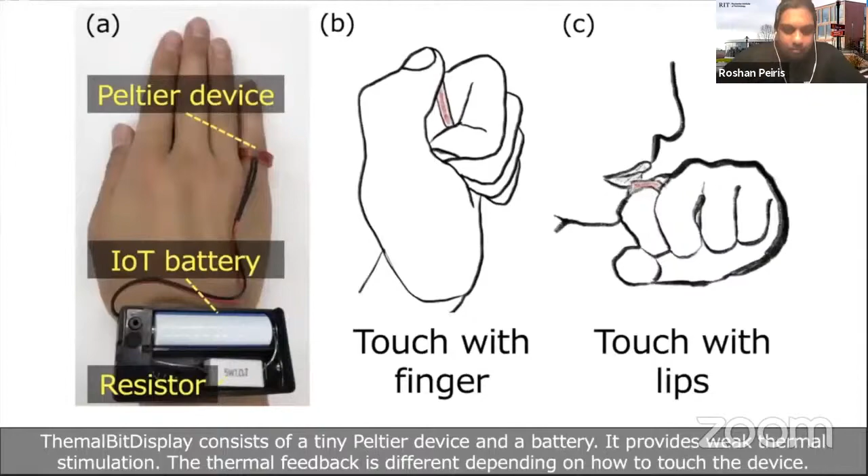Okay. I am Arinobu Niijima from NTT Corporation. We will present ThermalBitDisplay, which is a haptic display that provides thermal feedback perceived differently depending on body parts. ThermalBitDisplay consists of a tiny Peltier device and a battery. It provides weak thermal stimulation. The thermal feedback is different depending on how you touch the device.

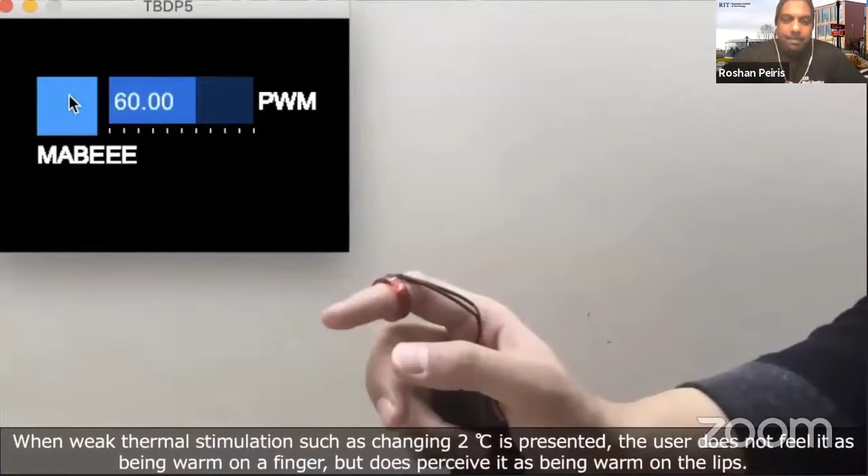When weak thermal stimulation, such as a change of 2 degrees Celsius, is presented, the user does not feel it as being warm on the finger, but does perceive it as being warm on the lips. There are some studies using Peltier devices embedded in wearable devices to apply thermal feedback to several parts of the body, such as wrists and fingers. Our motivation is to explore new interaction using thermal feedback for new applications that are different from those using vibrotactile feedback.

Our method is based on physiological and psychophysical studies on thermal perception. One is the different thresholds of thermal sensitivity for each body part. The lips are the most sensitive part of the body, and the extremities are insensitive. Therefore, weak thermal stimulation can be perceived on the lips. Another important feature is spatial summation of thermal perception. Due to it, the area of stimulation plays a prominent role in the thermal threshold. For example, if the area of warm stimulation doubles, the threshold can be halved. In other words, the smaller the area is, the more difficult it is to be perceived.

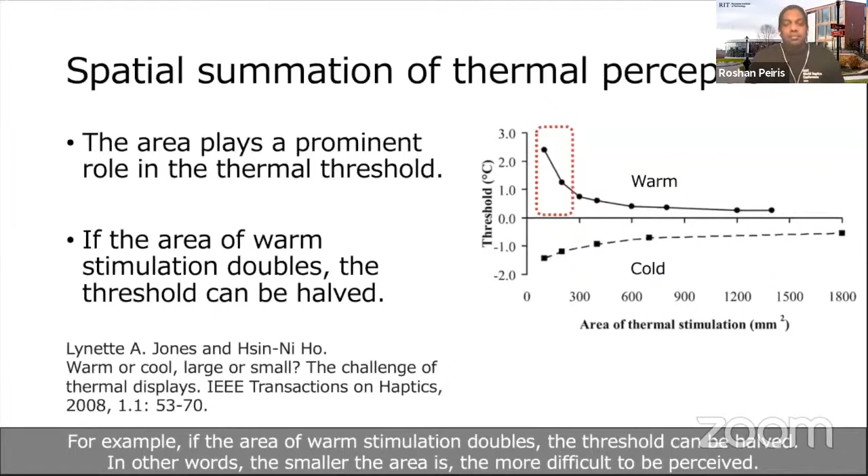Based on that, we decided to use the smallest Peltier devices to make the differences in the detection thresholds to thermal stimulation between each body part larger. We conducted a preliminary test to investigate different detection thresholds by an adjustment method with a tiny Peltier device. The results were consistent with previous studies. The more sensitive the body part was, the lower the detection threshold for warming and cooling.

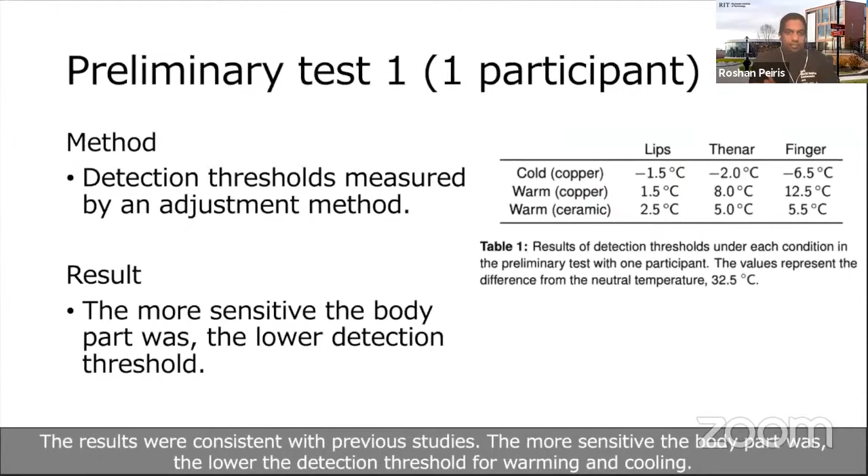Then we conducted an experiment with 12 participants. The question is whether the thermal feedback can be perceived differently between differently sensitive body parts. The task is to discriminate two different thermal stimuli presented on the finger, the wrist, and the lips. One stimulation is 25 degrees Celsius and the other is 27 degrees Celsius, presented by the tiny Peltier device. Participants conducted the task 20 times for each body part. The results showed that the median accuracy was 55%, 65%, and 95% respectively. These results mean that the participants could perceive the warm stimulation only on the lips. Therefore, the thermal feedback is perceived differently on the finger and the lips.

Next, we present ThermalBitDisplay with 3 Peltier devices. The outer Peltier devices were cold and the center one was hot. When touching them with a finger, the user perceives cold and no pain due to spatial summation. When touching them with the lips, the user perceives heat and pain due to the thermal grill illusion. We conducted a preliminary test with 10 participants to verify the phenomenon, and all of them described that when touching them with the lips, they felt hot and pricking pain. We assumed that the hot stimulation and the cold stimulation were perceived separately on the lips, so the participants felt heat and pain.

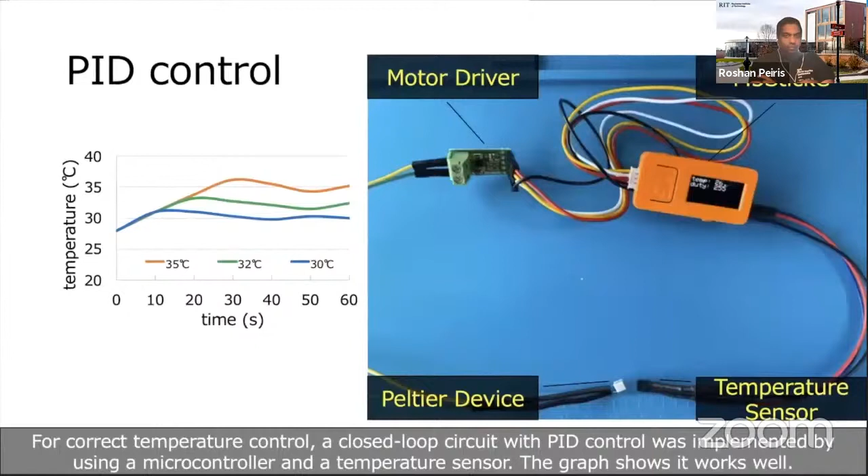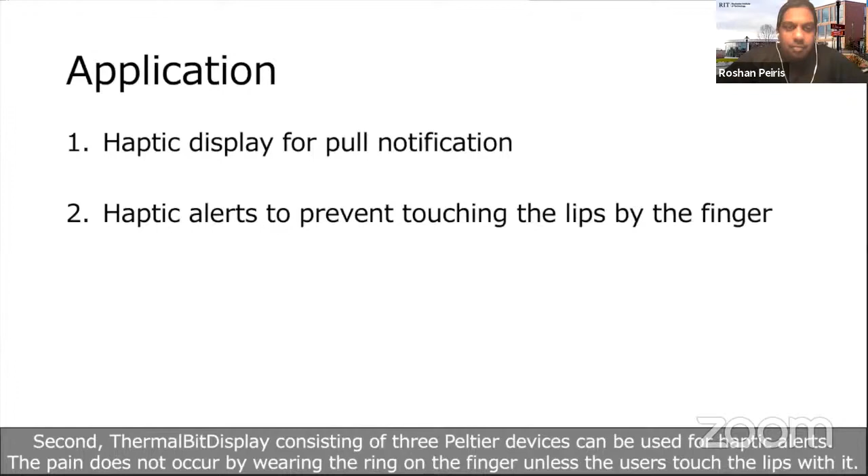Finally, we propose some applications. First, ThermalBitDisplay can realize haptic pull notification, unlike vibration, which is used for haptic push notification. Thermal stimulation does not interfere with the user's attention by just wearing the device. When they want to get a notification, they can do it by touching the display with the lips. Second, ThermalBitDisplay consisting of 3 Peltier devices can be used for haptic alerts. The pain does not occur when wearing the ring on the finger unless the user touches the lips with it. Therefore, it can prevent putting the fingers to the lips, and we consider it will be useful to prevent virus infection.

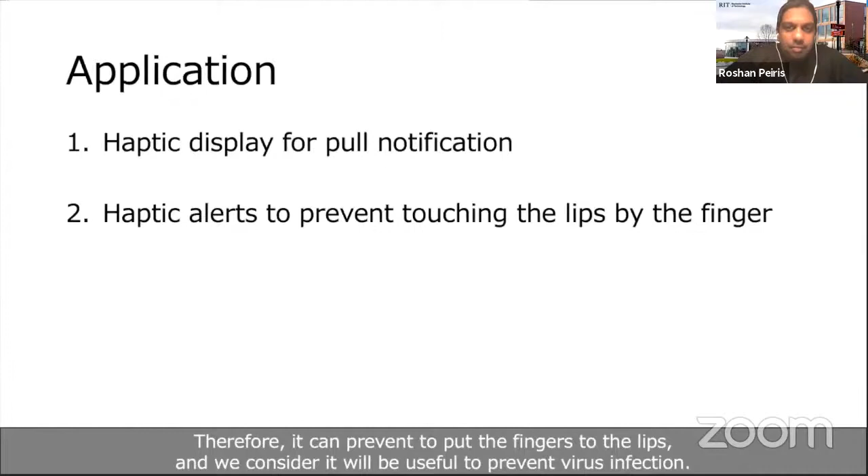Here is the conclusion. ThermalBitDisplay provides different thermal feedback depending on the parts of the body touching it by utilizing 2 features of thermal sensitivity. In future work, we will investigate the feasibility and usability in the real world. We will design the gestures possible with the device more carefully in view of cross-cultural considerations.

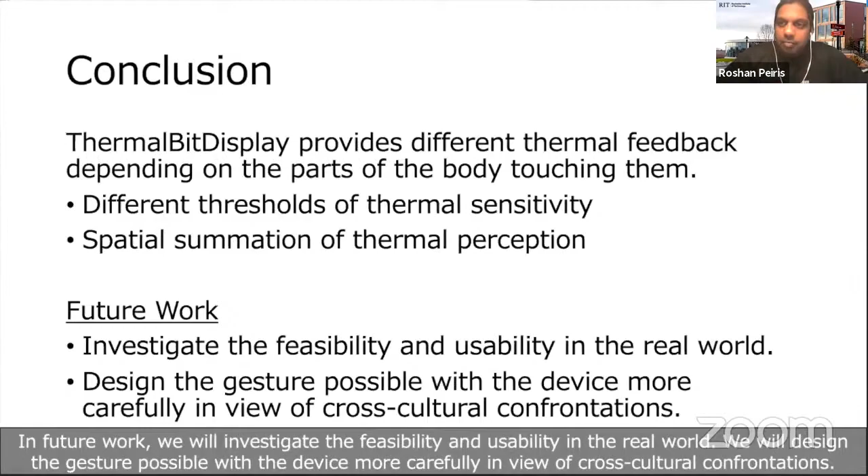Thank you very much. So I can see a couple of questions already in the chat area. So the first question is from Sebastian, he's asking what spatial resolution did you use between each Peltier element? Arinobu. Okay, thank you. The interval is 5 millimeters. Experiment 2. Yeah, we conducted only one pattern, 5 millimeters.

All right. Yeah, next question is from Pedro. Does Pedro want to ask it, or shall I go ahead? I can ask it if you don't mind, Roshan. Yeah, I think I'm putting my head in here again. Yeah, that was really cool.

I wonder, maybe I didn't understand it properly, but in the case that you called it a 2-bit display, I had one Peltier here and one Peltier here. Did you feel that your participants could only feel the difference between the two? So I feel they're the same or they're different, in which case I really only have 1 bit again, because I can put that bit on 1, I feel a difference, or on 0, I don't feel any difference. Or could they tell this is hotter than the other, this is colder than the other, in which case you then have all the 4 values again? Does it really do the 2-bit 4 values, or only difference? Maybe you can elaborate a little bit.

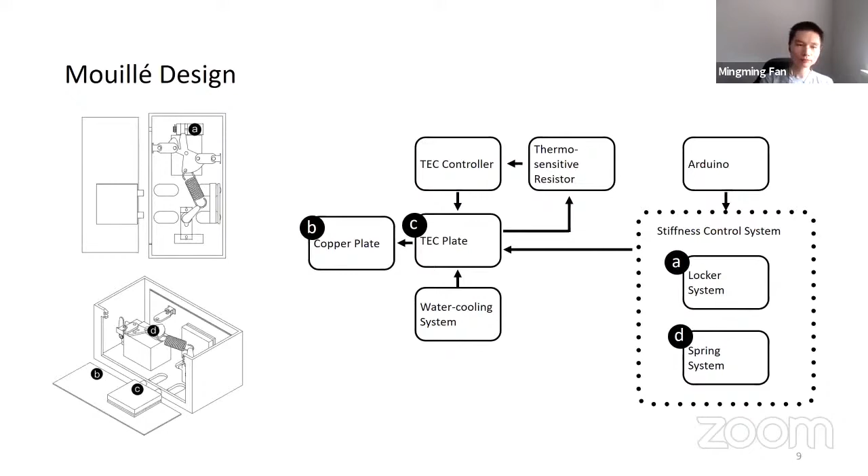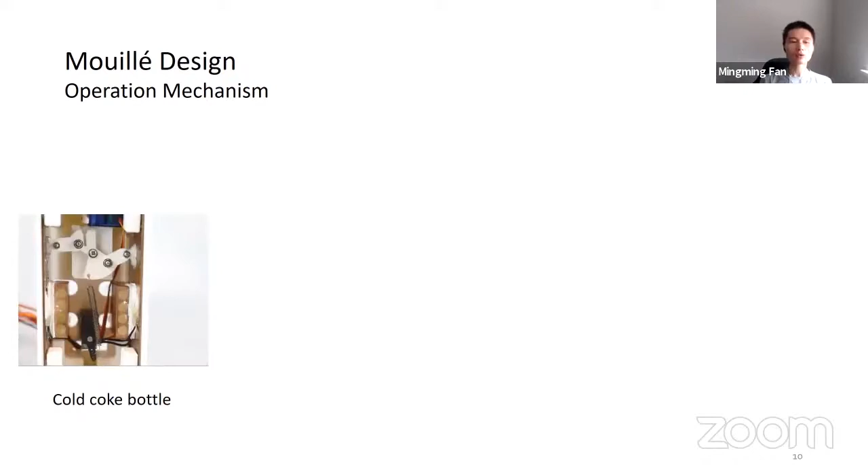So here you can see how Mouillé operates in real reality. Here is how we simulate the cold Coke bottle. As you can see in this prototype, Mouillé's locker system is in an unlocked position and the spring is fully expanded. This allows the full expansion of the prototype to give the user that flexibility of fitting. And if the locker system is placed in the locked position, we can simulate a hard object like an ice cube.

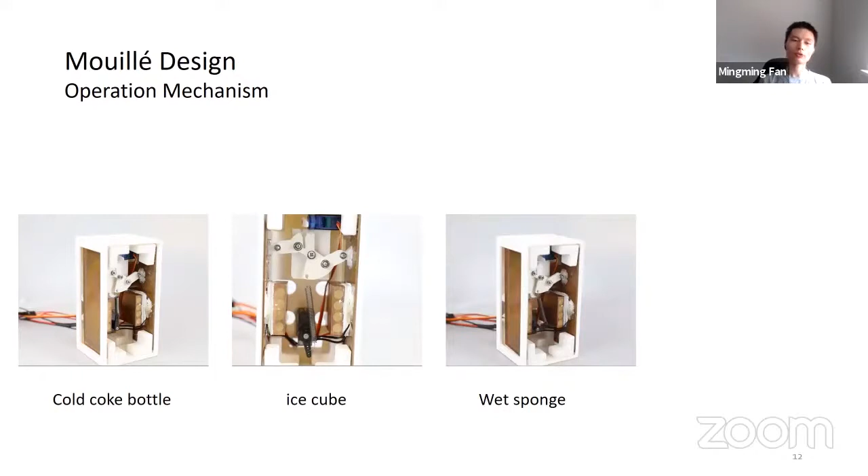And to simulate objects like a wet sponge, we apply a layer of latex on top of the surface so that users can feel the sponginess of the surface. And to simulate the wet table surface, we lock the system and place it horizontally so that users can scratch the surface to feel the wetness illusion.

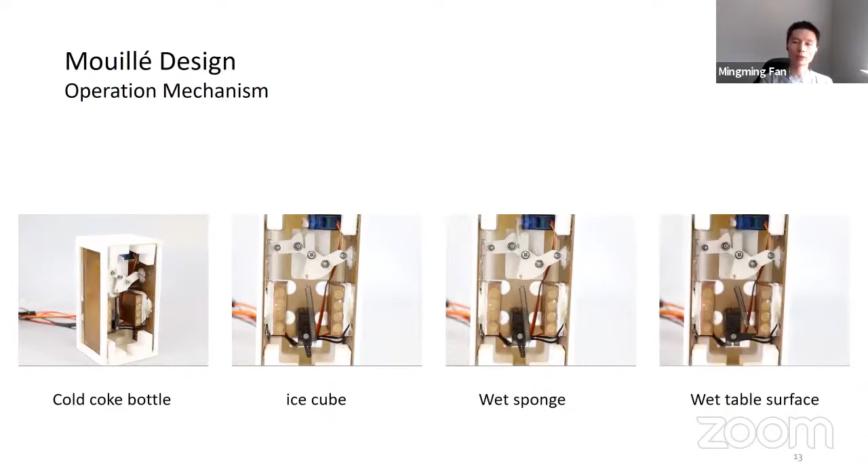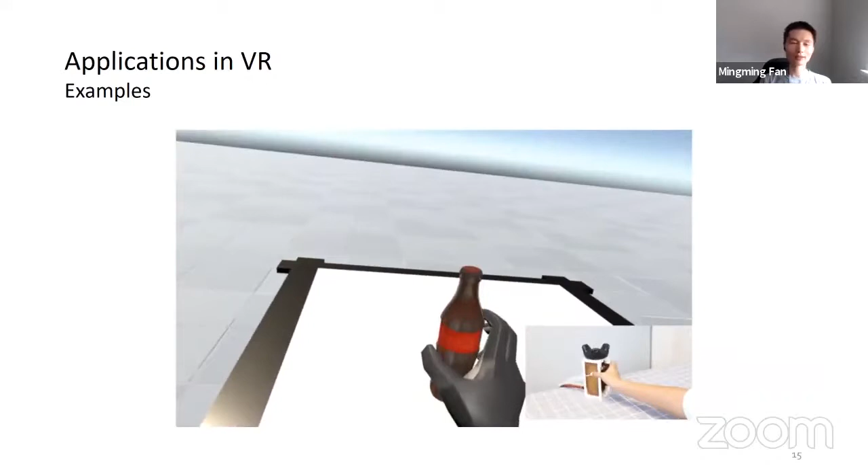And then we designed a number of applications that allow users to feel these different types of wetness illusions. So basically, as you can see, with the system we're able to simulate the wetness illusion for an ice cube, the Coke bottle, the wet sponge, and also the wet table surface when the user scratches on it.

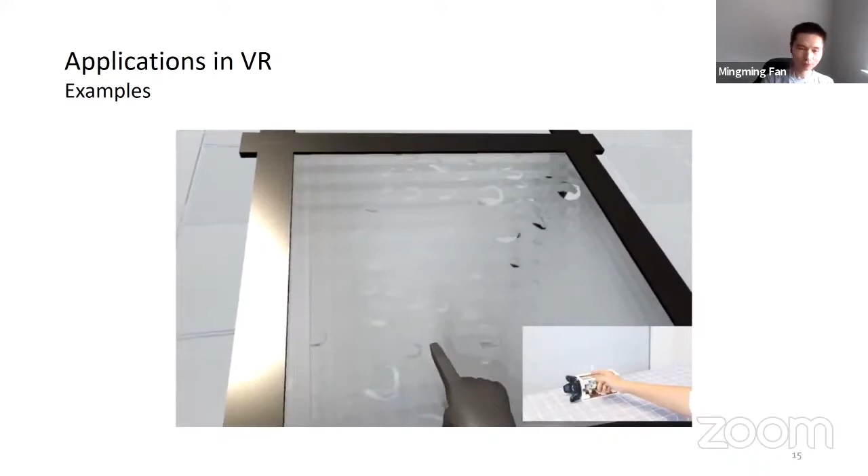And then we conducted a study. Basically, we wanted to understand, with Mouillé, could users feel these different types of wetness illusions? Could people distinguish the wetness illusion of an ice cube from a Coke bottle and from a wet sponge? And the second question is, if users were able to feel these different types of illusions, could they feel different levels of wetness illusions, meaning whether they can feel really wet versus a little bit wet.

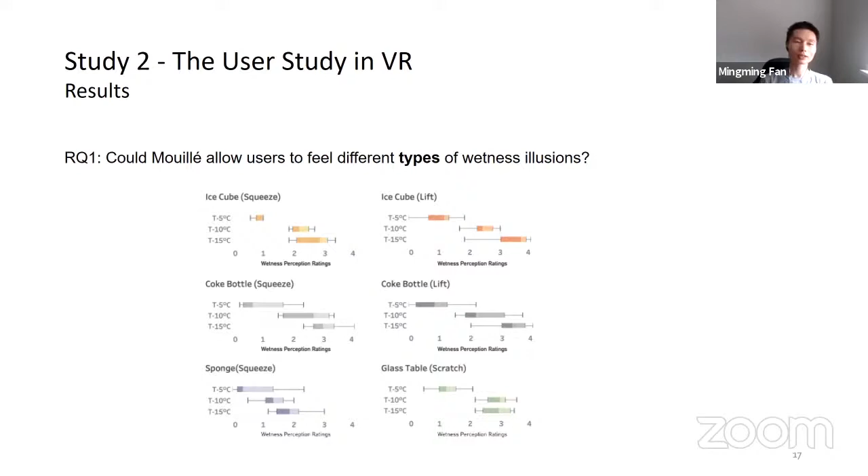Again, I think all the details are in the paper here, I just want to highlight at the high level. Yes, our results show that users were able to distinguish the different types of wetness illusions. And for the different simulated wet objects, users indeed were able to distinguish 3 different types of wetness levels for most of the objects. And for most of the objects, the accuracy was actually over 80%. But for the glass table, the accuracy was slightly lower, which I will go into later on.

So I just wanted to highlight some of the observations and the feedback from the studies, which we think are very interesting and inspirational. Here is that during the study, many participants actually asked us if we could help them dry their fingertip, because during the study, they were not allowed to see the system. So they didn't know what was going on to create that illusion of wetness. And they couldn't rub their fingers, so they wanted us to rub their fingers for them to dry the fingers.

And then later on, when we asked them what they think was going on, they told us that probably the system had a moisture generator, like a humidifier, and it might have a dryer which blows air to their finger to dry their fingers quick enough. And then maybe there is some mechanism to generate different types of wetness.

And here I wanted to point out 3 things we found interesting and sort of the limitations of the system, which we think maybe the community can help address looking forward. So one of the things is that the wetness illusions that Mouillé generates disappear much faster than true wetness. By that I mean, when the user's finger lifts from the Mouillé system, the illusion disappears. That's very different from getting your fingers wet by touching a wet Coke bottle, for example, because that true sensation will last for a while.

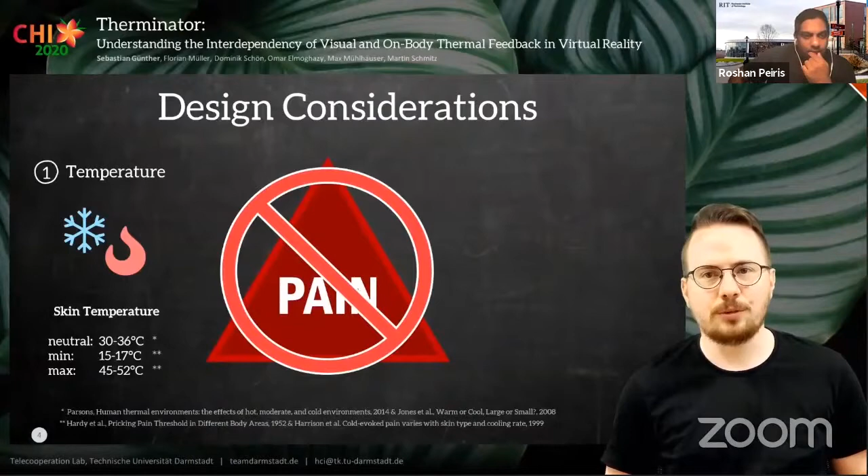Okay, so before we can apply thermal feedback to users, we have to look at some design considerations. First of all, we have to take care of the temperature range. Hereby, we need to consider the neutral skin temperature, which lies usually between 30 and 36 degrees Celsius. However, the range has to be limited since we do not want to cause any pain and take care of thermal pain thresholds, which lie at around 15 degrees Celsius as a lower boundary and around 45 to 52 degrees as an upper boundary.

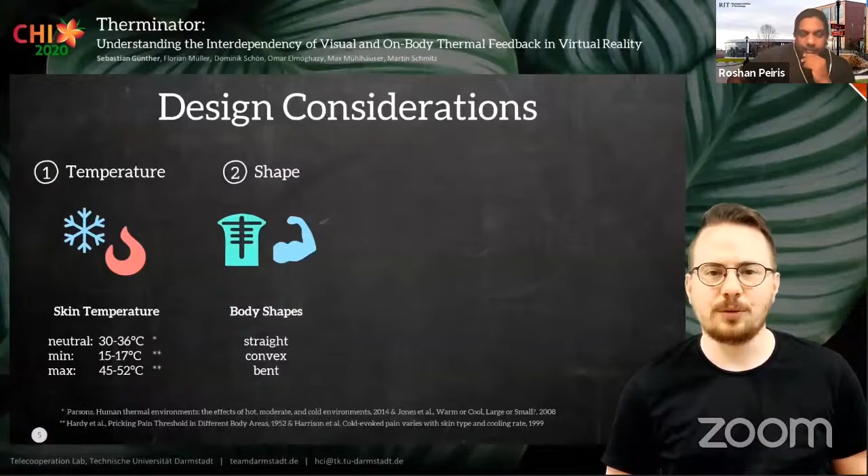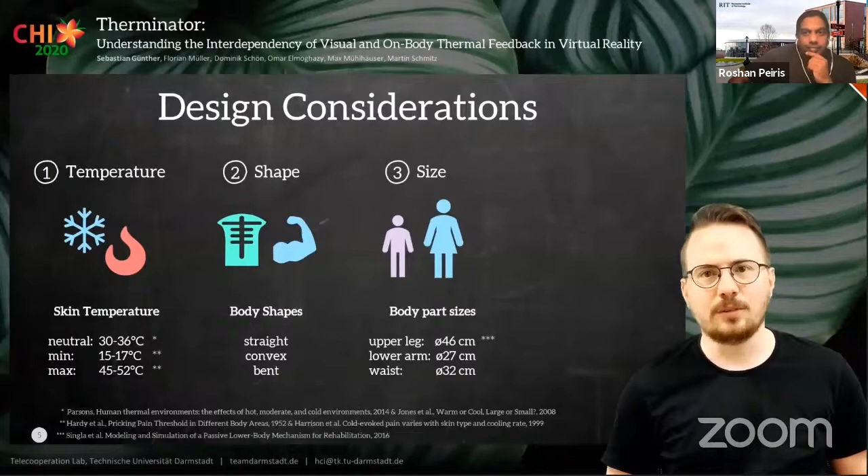Besides the temperature, we also need to consider different anatomical properties of the human body, such as different shapes of different body parts. For example, we have a straight leg, a convex abdomen, or a bent spine. Further, as humans differ in size, body parts are also not equal. For example, the upper leg is almost twice the size as the lower arm and can even vary between individual persons. And last but not least, we do not want to restrict any movements and have to consider varying degrees of freedom of different body parts which can have multiple joints and are able to bend or stretch.

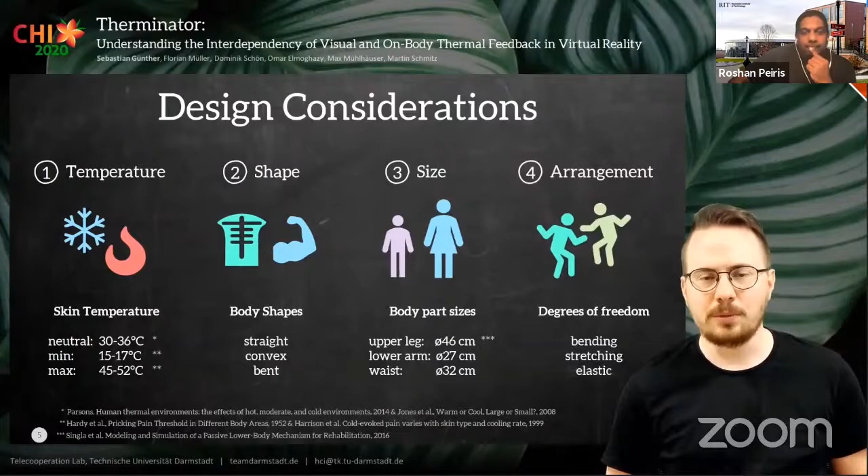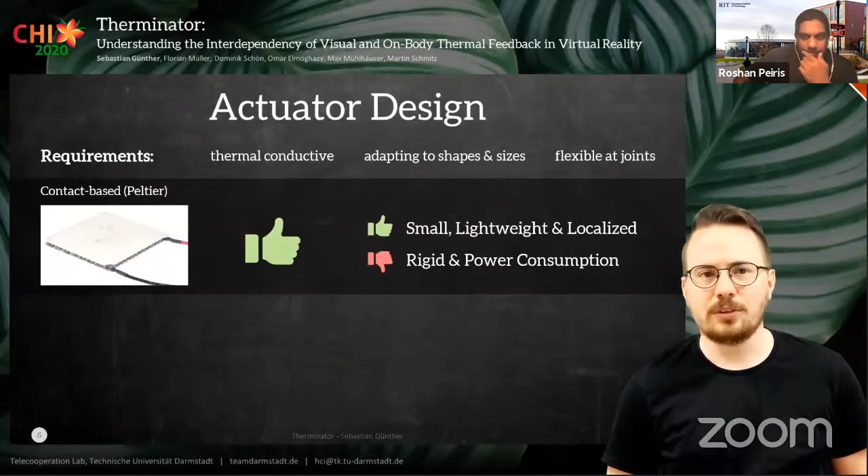So in summary, the requirements for thermal feedback are a good thermal conductivity, adapting to shapes and size, and it needs to be flexible at body joints. As thermal feedback is of course not completely new, related approaches often rely on contact-based solutions, such as thermoelectric Peltier elements. Those have very good thermal properties and also have the advantage of being small, lightweight, and can provide very localized feedback. However, due to their nature, they tend to have a high power consumption and can restrict movements through their rigidity, especially when simulating larger areas.

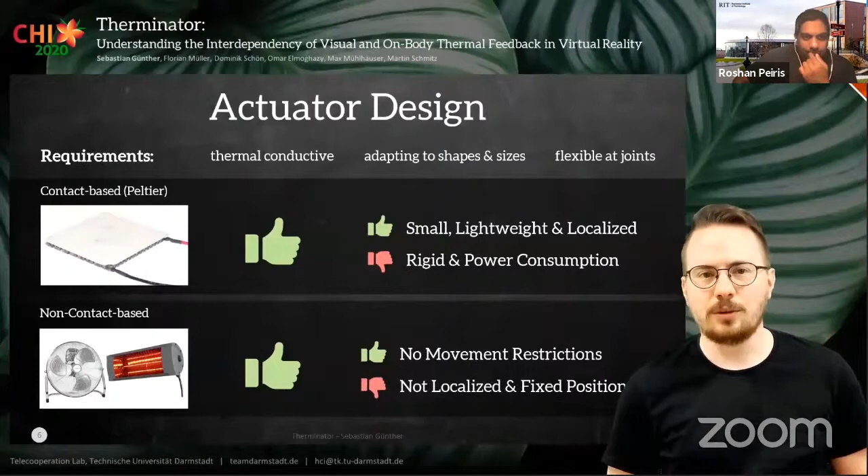In contrast, there also exist non-contact based solutions which use external heating units or fans. Those also have good thermal properties, but also have the advantage to not hinder any movements. However, since they are not directly attached to the body, it is not trivial to actuate specific body parts while the user is on the move. So, to overcome those disadvantages, we thought, why not use liquids as a medium to transfer temperature? And for this, liquids have the advantage to have good thermal properties and can be used very flexibly. In particular, we had a look at water, which has a thermal conductivity of roughly 0.6 watts per meter times Kelvin.

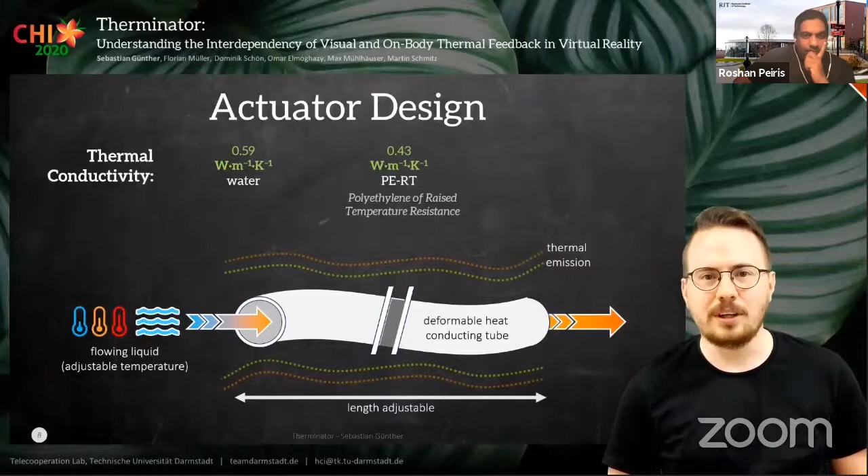Of course, liquids need to be inside some container to be actually useful, so we decided to take tubes which we can adjust, bend, and where a liquid with different temperature can flow through. For this, our tubes had to have similar thermal conductivity as water and allow for enough flexibility, which we found in tubes made of polyethylene of raised temperature resistance, or short PERT tubes. Using such tubes allows us to have different arrangements and numbers of interconnected subtubes in grill-like patterns to actuate small or large regions of the body. Further, we can reshape the tubes to adapt to different body parts and are also able to vary the length of each tube.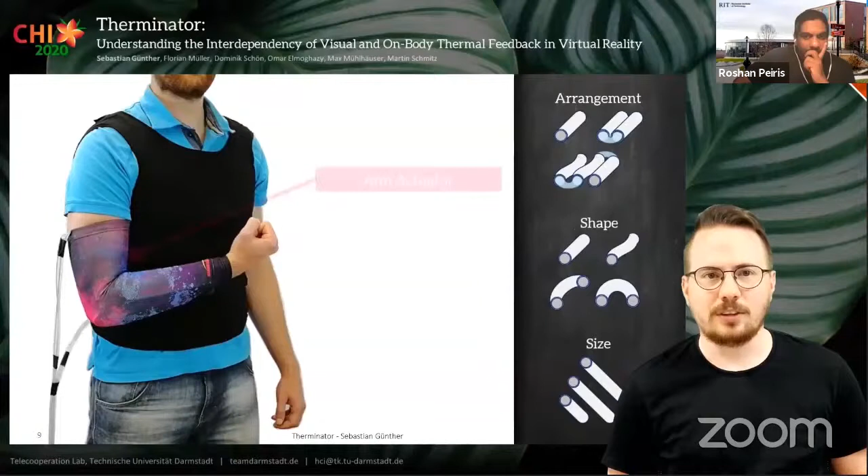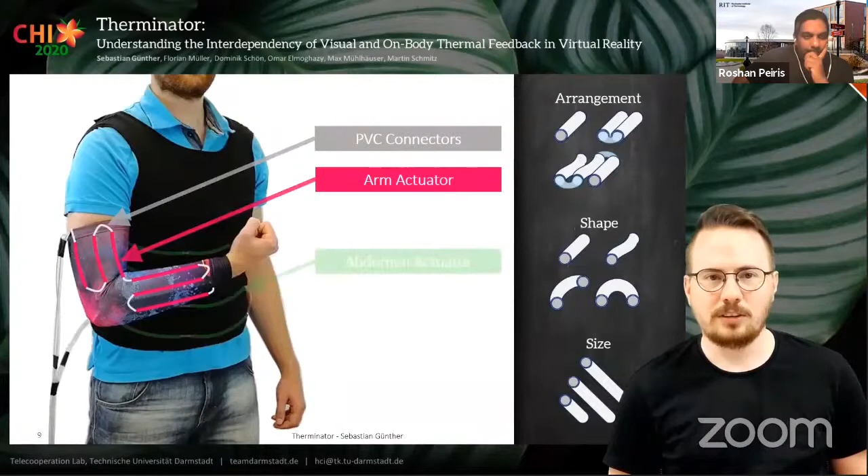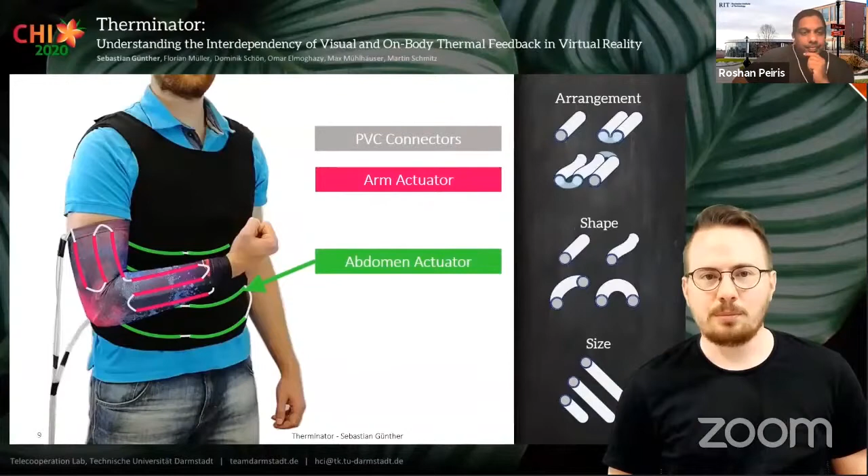As a proof of concept, we decided to design two actuators. The first can actuate the upper and lower arm. Here we use 8 subtubes which are connected through flexible PVC connectors to avoid movement restriction at the elbow joint. Second, we designed an abdomen actuator which aims to provide thermal feedback to a more flat part of the body and with a different anatomical shape than the arm. Finally, both are connected to our system's water cycle.

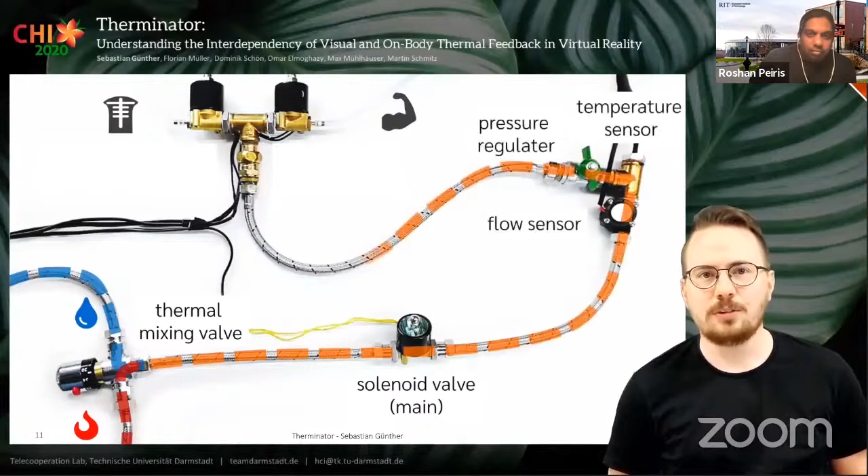For changing the temperature of each actuator, we mix a hot and cold water source using a thermal mixing valve. An electronic magnetic solenoid valve is used to control the actuation. We then measure the flow rate and inner temperature of the liquid and are able to adjust the flow rate through a pressure regulator. Then the liquid reaches 2 additional magnetic valves which control the flow to the abdomen and arm actuators.

And after having our system ready, we implemented 3 example applications which I will show you now. In the first, the user is a pirate on an island and needs to find precious gems. Those can be found in the water, which will cool down the user's arm when reaching for them. In the second application, a user plays a snowball game, and every time he gets hit by a snowball, the abdomen cools down quickly and slowly returns to the neutral temperature after some time.

In a final application, we simulate an emergency task where the user has to put out fires in a building. The more flames are extinguished, the cooler the environment gets. And okay, after this we thought, why should we stop here? Because there's something we still can do, as virtual reality can simulate unfamiliar situations such as having hot burning ice cubes. So we asked ourselves, what happens if thermal and visual stimuli do not match the temperature expectations of the user? For example, on the left, snow turns warm, and on the right, the fire turns cold.

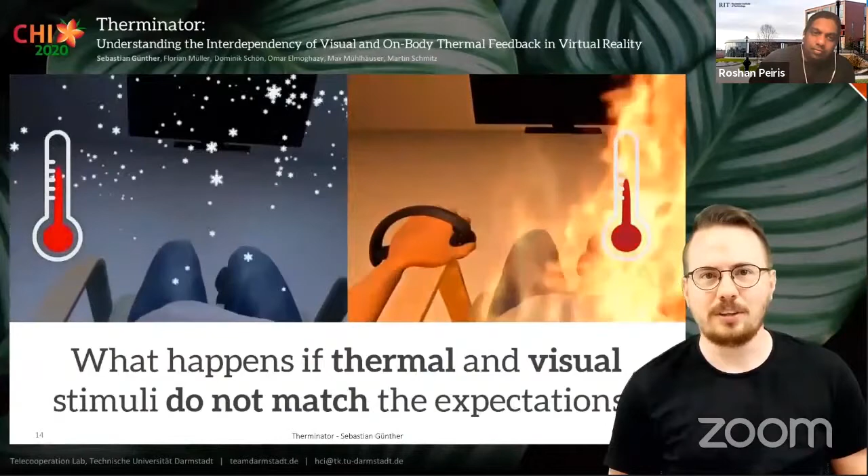Therefore, we defined 3 research questions which we wanted to investigate. First, how does the interdependency of thermal and visual stimuli affect the perceived temperature? Second, how do the thermal and visual stimuli affect the involvement of the users? And third, how do the thermal and visual stimuli affect the comfort of the users?

And to answer those questions, we first had to define what the thermal stimuli would look like. We used the neutral skin temperature of 32.5 degrees Celsius as a starting point. We then increased the temperature in 5 degree steps until we reached 42.5 degrees Celsius, so we stay below the upper pain threshold. We also did the same in the opposite direction and decreased the temperature in 5 degree steps until reaching 22.5 degrees Celsius, which is just above the lower pain threshold, resulting in 5 total thermal stimuli.

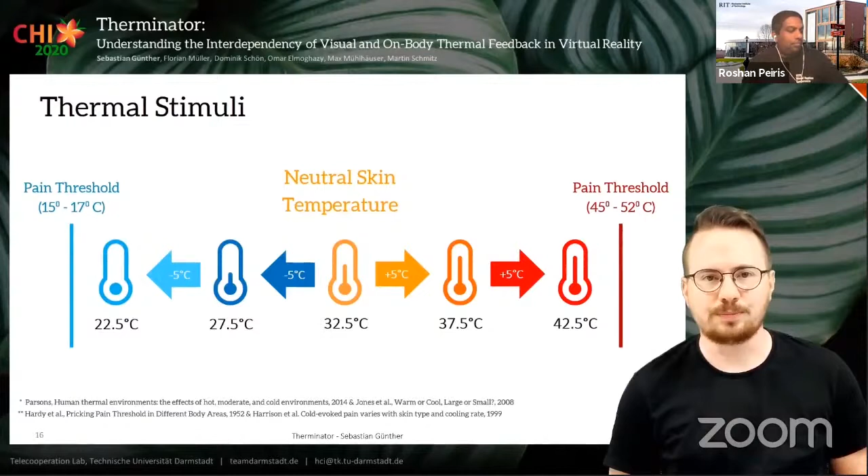For the visual stimuli, however, we had to identify meaningful visualizations. As Fenko et al. stated, objects convey different expectations of their temperature based on 2 factors. First, a literal or physical meaning, which conveys the actual temperature, and second, a figurative meaning that describes temperature by learned experiences. So to do so, we interviewed 7 HCI experts and asked them for visualizations, objects and other things connected to temperature, which they should rank from very cold to hot. Afterwards, we collected all the answers, clustered all items, and counted the common elements.

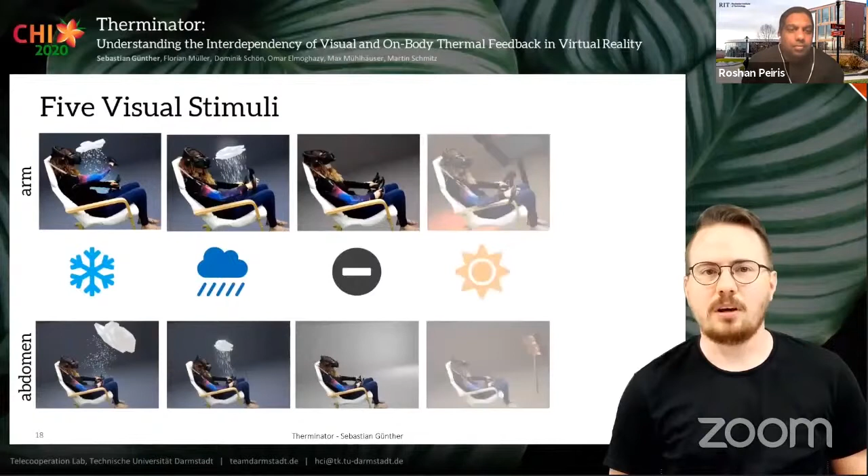This resulted in the following 5 visual stimuli, which we applied as visualizations for the arm as well as for the abdomen. We have a very cold snow visualization, a cold rain cloud, no visualization as our neutral visual stimulus, a warm heating lamp, and a hot fire close to the user's body.

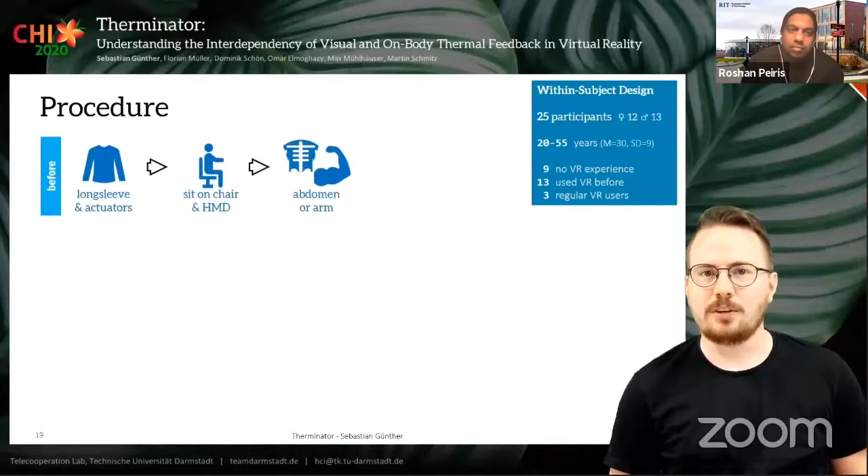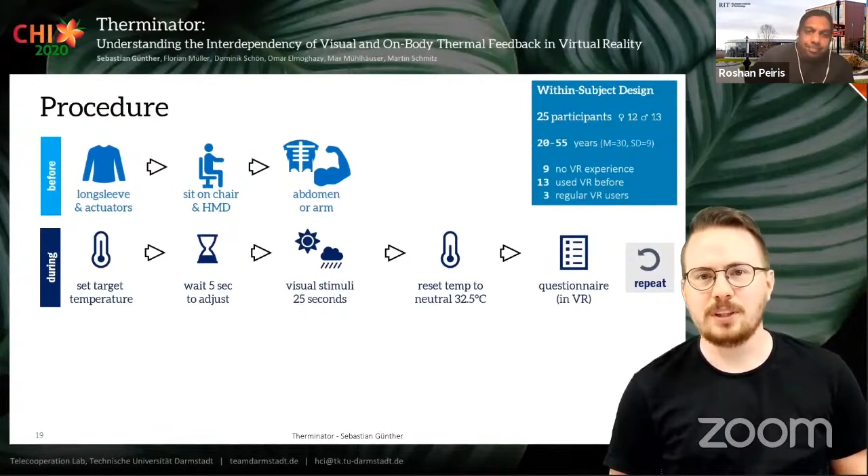For the procedure, I don't want to go into much detail. Basically, we used a within-subject design with 25 participants. All of them were provided with a long sleeve, were sitting on a chair and wearing our actuators beforehand. Each participant then started with either the arm or abdomen, and during each condition we combined each thermal stimulus with each visual stimulus and exposed each combination to the user for about half a minute. Afterwards, we reset both to their neutral stimuli and asked them to answer a questionnaire in VR, which I will show you in a second. In total, this was repeated for all 50 combinations. At the end, we asked for additional qualitative feedback through a final questionnaire and informal interviews.

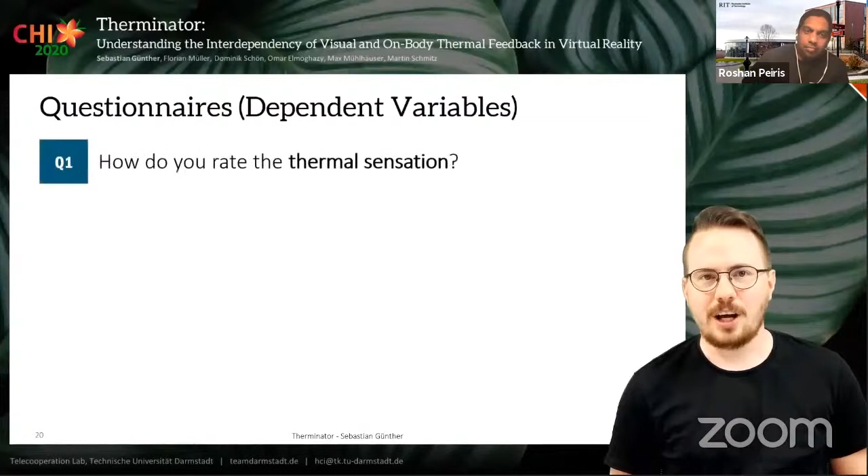As mentioned before, after each combination of the visual and thermal stimuli, we asked them to fill out a questionnaire with the following 4 questions. How do you rate the thermal sensation? How do you rate the thermal comfort? How much did the visual aspects involve you? And how much did the thermal aspects involve you? In the following, I will present our main findings. However, if you're interested in more details, especially lots of numbers and statistics, I would like to invite you to have a look at our paper.

So, okay, let's dig in to our results. As the first main result, we identified that every thermal stimulus always overrides the perception of visual stimuli. So for example, if we have a fire visualization combined with a cold stimulus, it still feels cold. As you can see here, where a lower number basically means a lower perceived thermal sensation and a higher number means a higher perceived temperature sensation. This was true for all other visualizations, and the participants were always rating the applied thermal stimulus as main factor for their temperature perception.

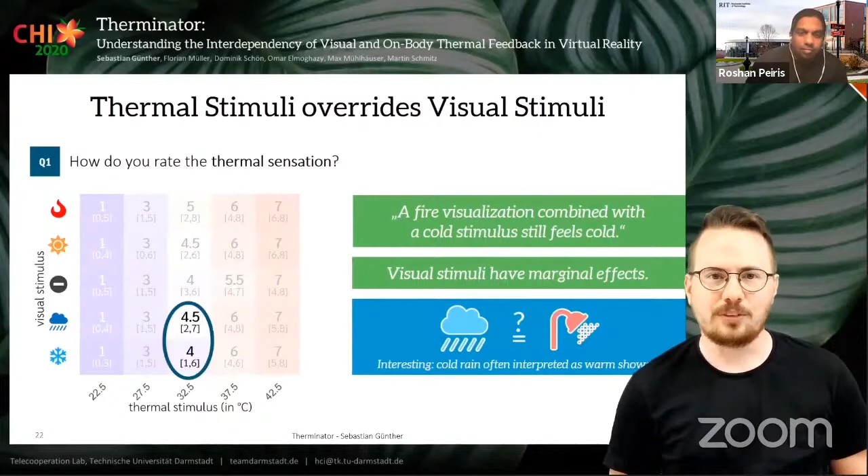However, if we take a closer look to the numbers, we can see that the visual stimuli still have marginal effects on the temperature perception. For example, for a neutral thermal stimulus, we see a significant higher rating while being exposed to a fire visualization compared to a snow visualization, which is also indicated by differences in the minimum and maximum ratings of the participants. One interesting side effect we could observe was an unexpected small shift for the rain visualization, which resulted by some participants describing it as warm shower instead of a cold rain cloud.

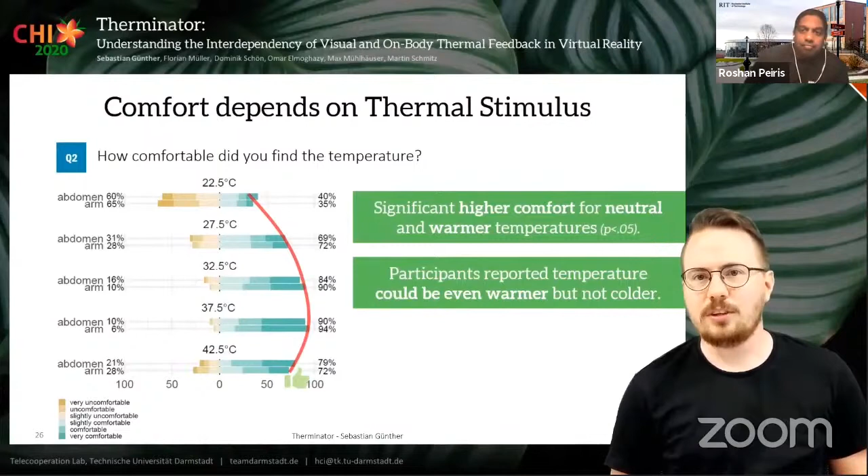Last but not least, with regards to the participants' comfort, we found that the level of comfort highly depends on the applied thermal stimulus. As you can see here, our analysis revealed a significant higher comfort for neutral and slightly warmer temperatures compared to colder stimuli. As a result, the overall consensus was that temperatures generally could even be warmer, but should not get colder, as more chill temperatures were perceived as uncomfortable and more intense.

And before concluding my talk, we, of course, identified some limitations. First of all, we only investigated the abdomen and arm and need to identify how other body parts will perceive the thermal stimuli provided by our system. Also, we only combined one visual and one thermal stimulus per condition. However, what would happen if we have multiple stimuli combined at once, or even actuate different body parts with different stimuli at the same time?

And lastly, while not described as restricting the users more than the HMD cable, our system currently relies on an external source which needs to pump the liquids to the actuators. Hence, we need to find reliable ways to increase the mobility, for example by having smaller amounts of liquids and thermal devices in a wearable backpack.

And hereby I want to conclude my talk where I presented you Therminator. I presented you a set of concepts and design considerations, a prototype along with 3 example applications, and a systematic evaluation investigating the interdependency of thermal and visual stimuli, where we found that thermal stimuli always override visual stimuli, congruent stimuli increase the involvement, and the comfort depends on the thermal stimulus.

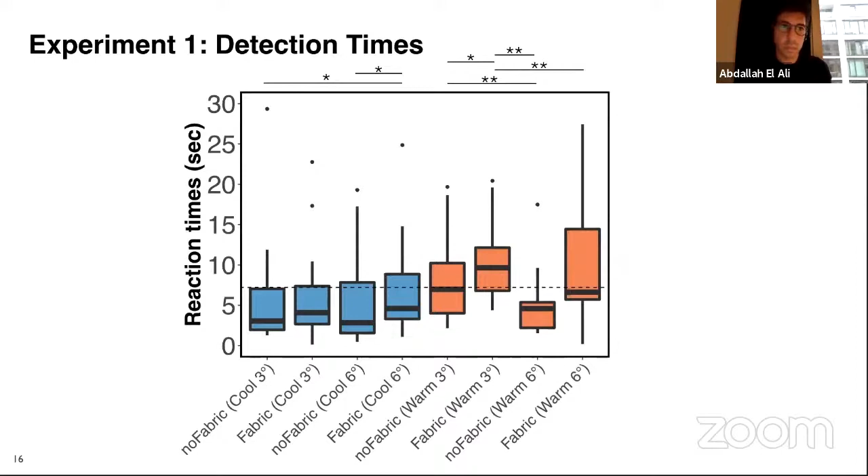For cool stimuli, the average detection times range from 5.5 seconds low intensity to 5 seconds high intensity. So due to this, we chose to continue testing for experiment 2 without any fabric.

In the core study that we've done in this paper, we draw on the EU Emotion Voice database, where we selected 8 messages and synthesized neutral counterparts using WaveNet. We ensured that these were indeed perceived to be neutral through an annotation study that showed high intra-class correlations. So first I'll play the EU Emotion Voice version, and then followed by the version that we generated.

I love chocolate. And now the neutral version. I love chocolate. And for our negative valence message, cover your mouth when you sneeze. Cover your mouth when you sneeze.

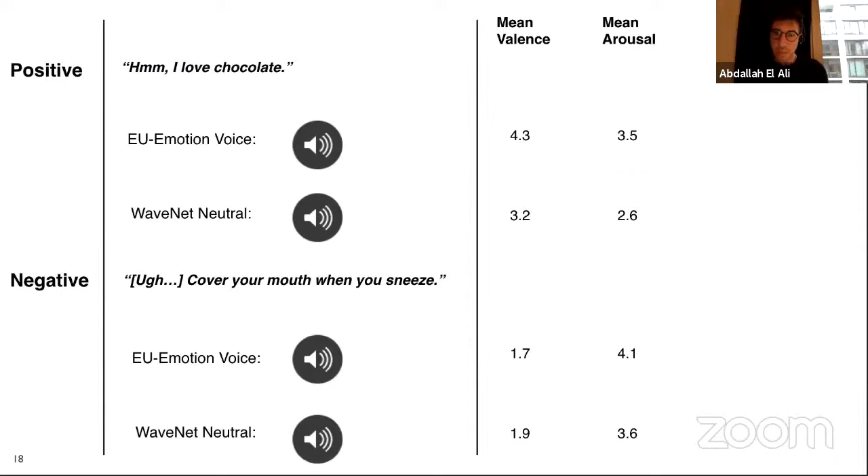There's a lot more details in the paper, which aids in reproducing our work, so please take a look if you're interested. For this study, we had a 2 positive versus negative message valence by 3 warm versus cool versus no stimulation design. After experiencing the stimuli and voice message simultaneously, participants entered their valence and arousal ratings through a 5-point self-assessment mannequin scale on an Android app.

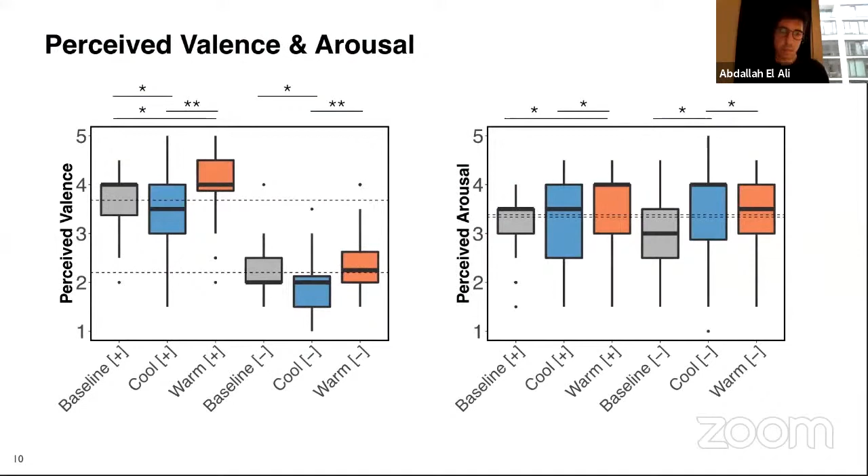Since our data was not normally distributed, we applied Friedman rank sum tests and post-hoc Wilcoxon signed-rank tests with Bonferroni correction for pairwise comparisons where applicable. But what do these results mean? First, thermal stimulation influences valence of a neutrally spoken voice message, but this, however, varies across cool and warm stimuli. Second, while warm stimuli increase the valence of positive messages, this is not so for negative ones. Cool stimuli, on the other hand, lower the valence of both positive and negative messages.

While our results support Salminen et al.'s classic study that showed that warm and cool stimuli can increase arousal over neutral, our findings, however, differ from Tewell et al.'s work on thermally stimulating Facebook posts, where they don't find an effect of thermal stimulation on valence ratings.

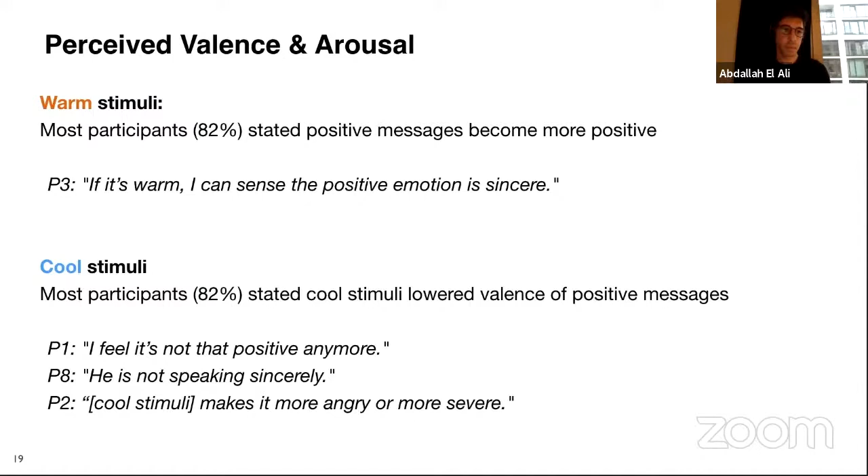And so finally, based on our semi-structured interviews, we see similar patterns as before. So for warm stimuli, most participants found that positive messages became more positive. So like P3 said, if it's warm, I can sense the positive emotion is sincere. For cool stimuli, most participants found that such stimuli lowered valence of positive messages. So some examples include P1 saying, I feel it's not that positive anymore, or P8 finding that it lowers sincerity, or P2 saying that cool stimuli makes it more angry or more severe.

So there's a number of considerations from our work which I'd like to go through. So first, it appears that warm and cool stimuli are comfortably tolerable on the upper chest area, are easily perceived and quickly detected. Also, we need to consider the trade-off between user comfort and detection time when adding fabric. In our case, adding fabric did not provide more comfort, and was at the cost of detection time.

Third, as shown also in prior work, the message context matters whether thermal stimuli influence both valence and arousal or only arousal. In our case, we had brief voice messages, which were standalone units of conversation, and so thermal augmentation works well here. Also, while we tested this and discussed it in the paper, we did not, and perhaps cannot, recreate missing emotional prosody in a consistent manner using thermal stimuli. So in this case, this goal is probably not one to pursue.

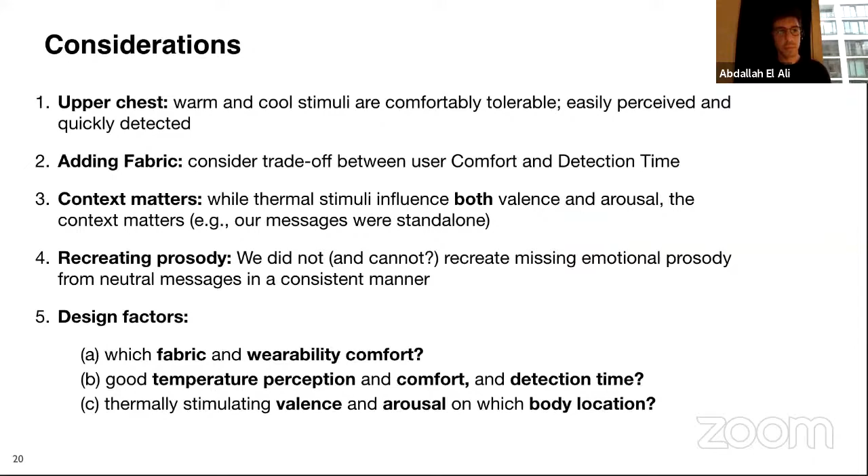Finally, we can wrap up with a number of key design factors that we found can aid in constructing such thermal augmentation displays. So first, which fabric and wearability comfort are we aiming for? Second, what for the designer and the target user is a suitable temperature perception and comfort, and what detection time is required for such a design? And finally, what is more important, thermally stimulating valence, arousal, or both? And on which body location?